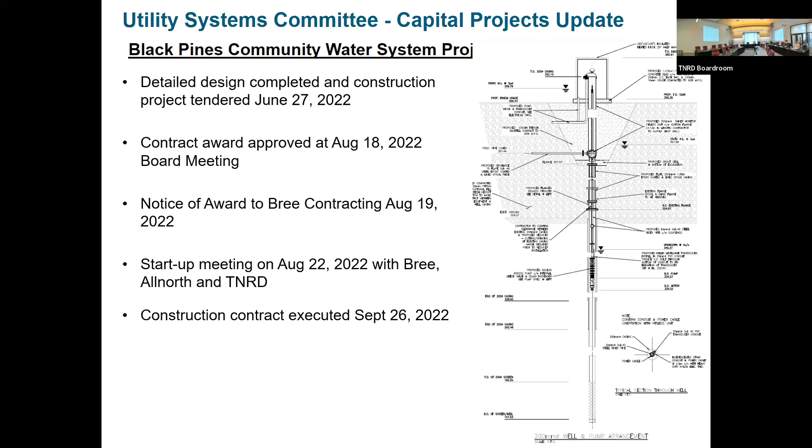The main reason for that is coming up. We have a very tight timeline, this has to be done by the end of February, early March for our grant. So the first time we'll see any work on site is when the contractor mobilizes on the 17th of October, and they'll start their earthworks.

Before the freeze up happens, we'll have the pitless adapters, which are the connections to the wells, and then the underslab spools. These are the piping that come up into the building, and the connections in between while they're building the grade up as well. That's targeted to be complete by mid-November.

The building itself should be complete, and I'm only talking about the structural part of it, by mid-December. Once that's complete, mechanical and electrical installations will occur during the freezing months, when we typically don't want to do a lot of earthworks.

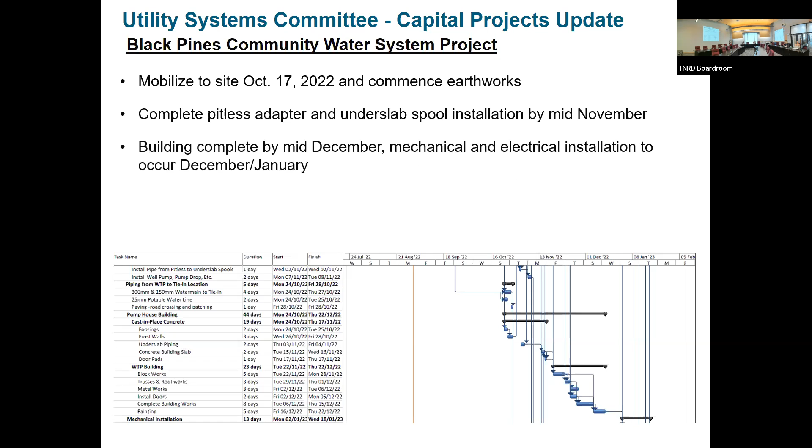Our completion date provided by our contractor and our consultant is February 8th, 2023 for this. We do have a deadline of March 31st, 2023 for the entire project, including claims and everything else. So it's a fairly tight timeline, and we're on top of this to keep them going.

I've thrown up an excerpt from the construction schedule for you to see, but there's a lot that goes into this project. We're tying in to an existing water system at the opposite end of the current source. We're replacing the current source with groundwater, and we're bringing in 2 wells to a single pump house, then conveying that into the distribution system.

We have a crossing of West Side Road to complete, and we're also working in proximity to the Trans Mountain expansion pipeline. Looking forward to this one, I'm really looking forward to this one being completed.

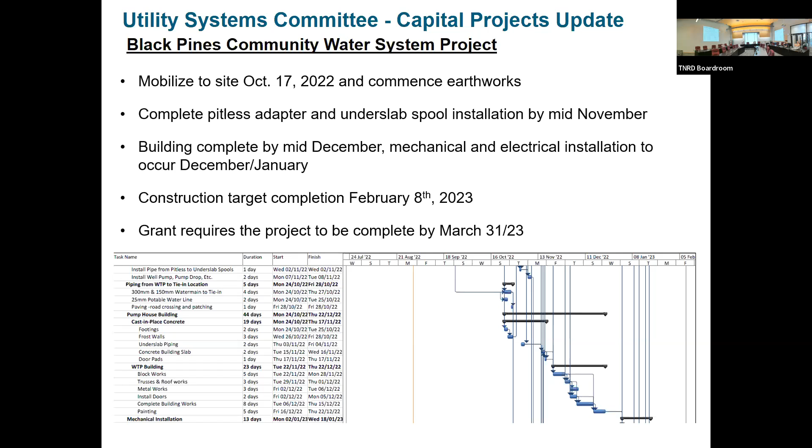Water metering program - this should be the last time we have this on our capital projects update. The final portion of this was to update our bylaw, which we completed in November 2021, and we did a brief update on this then. Mock billing is required to be completed for 4 quarters prior to switching over to metered rates for all communities.

We have completed them in Q1 for select communities - those were, I believe, Spence's Bridge, Del Oro, Evergreen, Maple Mission, and perhaps Walhachin. The remaining mock bill communities were sent out in Q2 of 2022.

These were late, so you may have some residents asking where these were. We did communicate that they would be out in Q2, but they came out about 2 months into Q2 due to a software issue we're working through with the finance department. It's a whole new process to try and do mock billing, and there have been some roadblocks there.

Loon Lake remains outstanding. I don't know if you recall when we presented the utility rate amendment bylaw in November, that we did not establish a rate for Loon Lake. It's a challenging one to determine what the utility rate should be, as it's very seasonal, and currently the water on or water off fee is set at 50% of the water on rate to continue to generate enough revenue to operate that system.

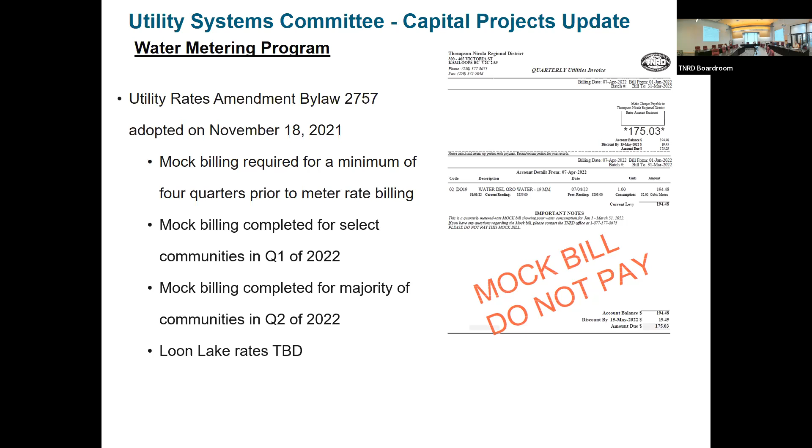Finally, for the metering program, we continue to encourage all of our users to sign up for EyeOnWater - this is their window into their water meter. The water meters update every 24 hours with the water volumes and flows up to a 15-minute interval, and users can see this. It's all cloud data through cellular technology, and users can sign up.

We've had really good buy-in, especially twice a year or so when our Waterworks newsletters go out, but it's starting to stagnate, so we're looking at different options to improve that.

So this project is complete, and final claims will be made in Q4 2022. By the end of this year, this one will be completely done and off our books. So really happy with how that one's worked out.

The Pritchard Community Water System filtration project has secured $4.95 million in grant funding, covering 100% of eligible costs.

Detailed design is 95% complete. We have electrical outstanding right now, and some of the engineering required for the optional items are outstanding.

But we have a 3D rendering of what the water treatment plant will look like, or is proposed to look like.

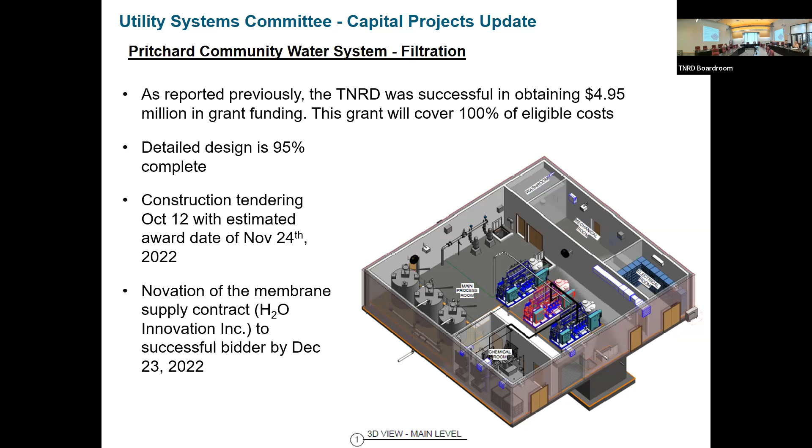There's a bit more on this. We have some optional works in this, since it's been a challenging environment with construction and pricing to figure out what we can squeeze into this. So we intentionally went ahead with our grant application with some optional items to complete, so that we could account for fluctuations in the market out there.

Some of those works would include the Bostock Crescent water main upgrade. This is taking an older 4-inch asbestos cement main and upgrading it to a 6-inch main to improve hydraulics as well as fire flows. And then there's the upgrade or conversion of our current dry well.

We have 2 intakes right now, one's a dry well, a failed dry well, and the other one is a wet well. The dry well is dry, the wet well has water coming into it from the river. The intent is to interconnect the two at a lower elevation. Right now, the elevation where they're interconnected is too high to operate for the majority of the season. So we would interconnect down below and take this very large casing that we have and convert it into a new intake.

This would allow us to eliminate and basically mothball our existing intake, which is from the 70s. So that's one we have our fingers crossed we'll be able to have enough funding for in this project, but we do have 2 alternative options for the intake as well.

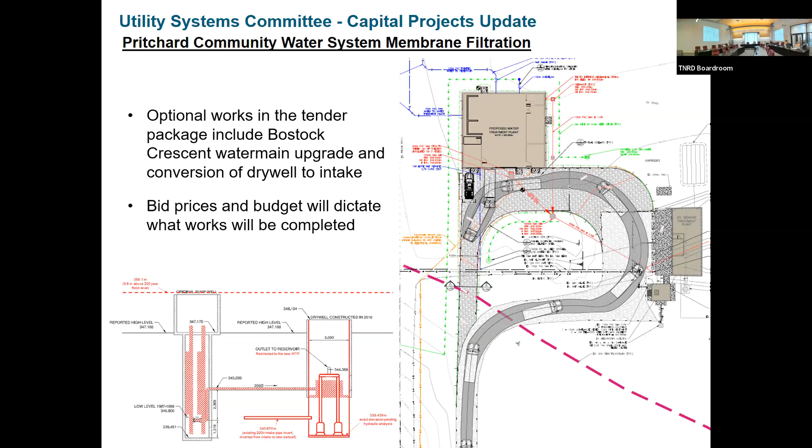All right, moving on to the Blue River chlorination, and this goes into our CCBF funding. So we awarded a construction contract to Spooner Industrial on March 3rd, 2022. This is shortly before the previous utility committee meeting.

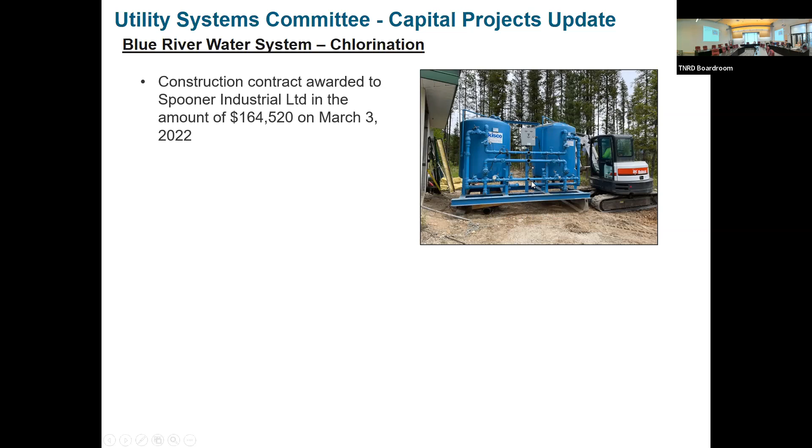This picture is of Spooner removing the existing filtration system that was never used from the current building, which freed up space for us to convert to our chlorination system. So we have a dual tank, dual pump system contained in the same area the filtration unit used to be, and we've added ventilation as well as some walls to keep that separate from the primary mechanical and electrical processes.

So the construction was completed in July this year, and we went online, and it's operational. We have had some issues as we've been operating - there's been some degassing issues, which result in airlocks of the chlorination pumps, which results in fluctuating chlorine levels in the system. We've been solving those and adjusting the chlorination dose to start lowering it.

So maybe more of an operational item, but we started off with a chlorine dose from the water plant itself at 2 milligrams per liter, and we've since July dropped that down to 1.3 milligrams per liter. We're monitoring it throughout the system to check the residual decay and how persistent it is. We'll be making adjustments operationally as we go to try and find a happy medium of adequate chlorination while minimizing the impacts to the customers.

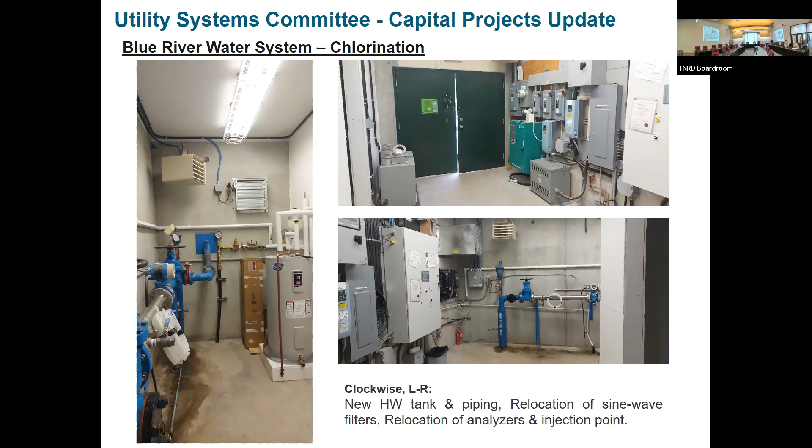Okay, yeah, because Blue River - if you know anyone in Barrier that would like to purchase some backups, I'm listening. Yeah, no, because they have 3 tanks in Barrier, the same as you had 2 in Blue River, and one duplicated within the tank. I don't know if they can use that, but the one is well utilized. So maybe I should tell them, talk to you about that.

Right, so what we have left here - we have these two tanks, they were emptied of the green sand which was in them. They were intended for the manganese and iron removal, and all the piping as well that comes with them and the controls are all there. We have those sitting down in Mission Flats, and we've looked at alternatives for it. The one issue we have is that it requires a significant amount of water to backwash to regenerate, and disposing of that in most of our current water systems is very challenging.

Yes, and they're equipped for the backwash, because we put in all new backwash tanks to utilize that system. So maybe Bob or somebody from Barrier Systems should talk to you about it. Yeah, because ours cavitated, it broke a hose inside that's cracked, and they have a problem with one tank and don't utilize it for the system, but that would fit right in. I've been up there and saw that they're exactly the same tanks.

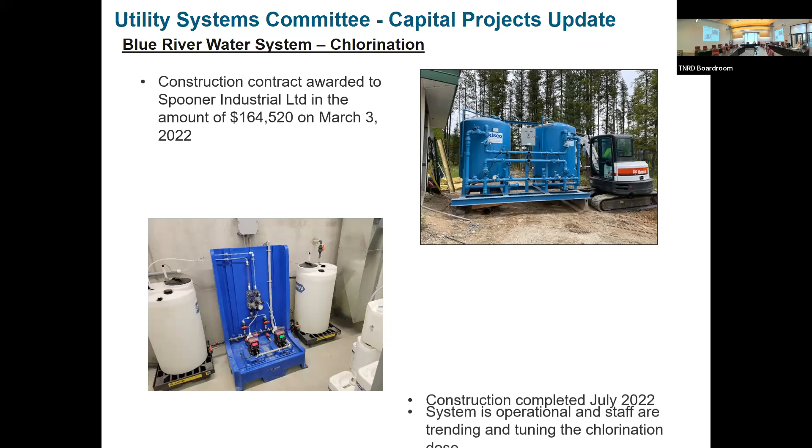I'll move on to our Paul Lake sewer system. The board approved $109,000 for a communication upgrade on this wastewater system, targeted at our lift station, for communication between the lift station and our wastewater treatment plant. The system was put in in the mid to late 90s, and not a lot of significant upgrades have occurred since then.

At the same time, we have a telemetry line that runs between the two locations that will be converted to a DSL line, which will allow basically an internet line between the two, which also allows us to get a VoIP phone down there.

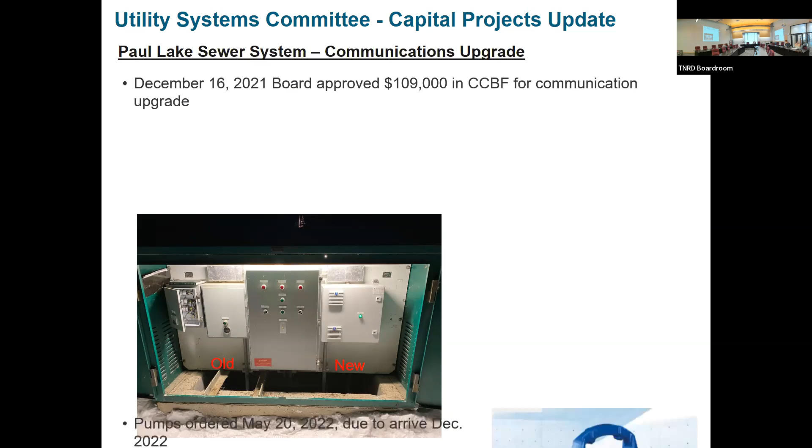This gets into some of the challenges we've been having with supplies and the supply chain. We ordered these pumps in May 2022, and we were originally told one pump was 6 to 8 weeks away, and the second pump would have been 6 months. Then it went to 10 to 12 weeks, and now we're expecting them to arrive December 9th.

We're trying to be proactive on this project, to get 2 pumps so that one of the remaining good ones is a backup, so we don't have to deal with a 6-month delay. And just to get to that point, we're dealing with these delays on this.

Fortunately for us, our starter panels, control panel, and communication devices are not delayed like that. There were some items we ordered that were only 3 days out. So the long lead time items were the pumps on this project - this is just going to extend this project longer, is all.

Then we have our automatic transfer switches. In 2021, we had CCBF approved for automatic transfer switch installations. We awarded a contract in June this year, and 3 of the 6 installations have been completed - Savona, Del Oro, and Walhachin. The Loon Lake ATS funding was approved, I believe, at the March board meeting, so we have yet to order that one.

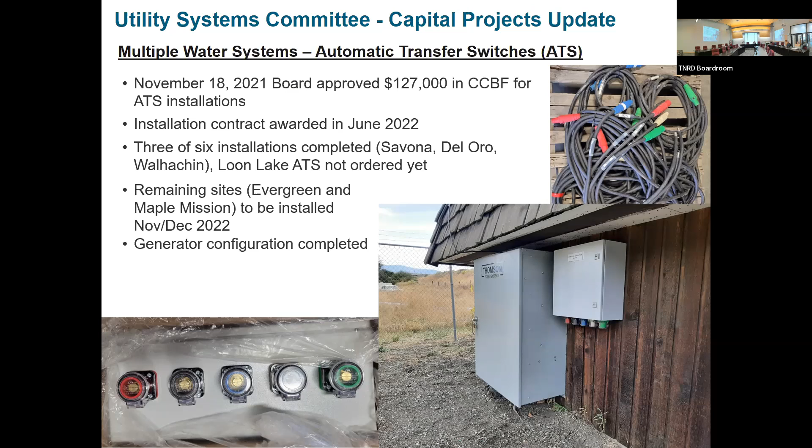This is a picture of the Savona transfer switch, and we also have a connection box for our generator. This is the bottom side of the generator connection box, and what that allows us to do is take our portable generator and, using the color coded cables, just plug them in - green to green, red to red, blue to blue, black to black, white to white - turn it on, make sure you have the correct voltage, and go.

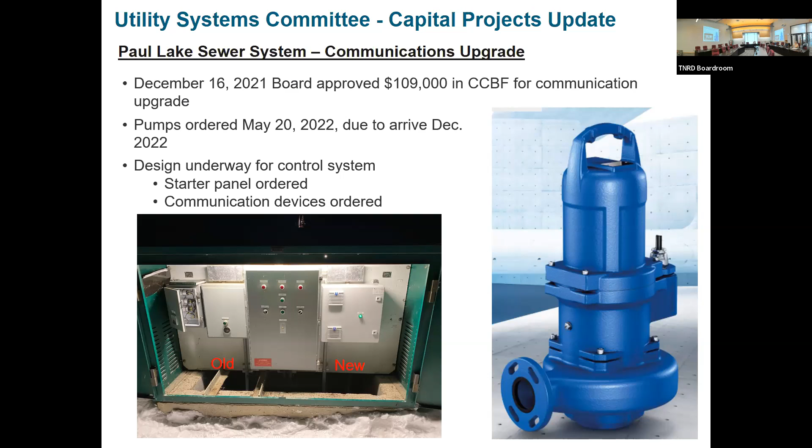So our transfer switches - 3 are complete. We have 3 more to go, one of those being Loon Lake. Evergreen is on the schedule next, and Maple Mission will be shortly after.

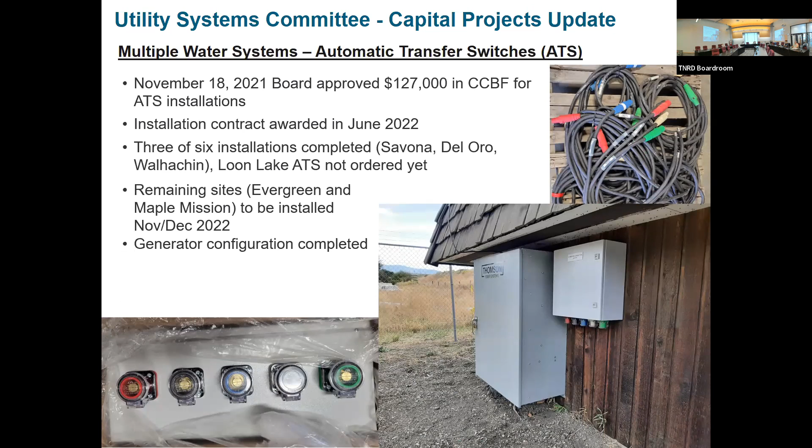Getting into our other funding, the donations from Trans Mountain and Canfor - we did a pre-design, commissioned True Consulting to complete a pre-design report back in June. This was part of a grant intake that had opened and we were looking at options, also furthering our original master plans which identified improvements for the systems. Our cost estimate on the draft report was about $5.3 million to build a filtration system similar to the Pritchard one for Vavenby. Three years ago when we applied for Pritchard, we were at 4.9 million, so costs have escalated significantly.

So we didn't move forward with the grant application - the funding wasn't there. But out of this draft preliminary design, we had some recommendations to further enhance it. One was to look at the environmental permitting summary - what requirements there are for discharging backwash water to surface, to ground, and the riparian area and other things like that. We also had a geotech investigation for the building, so the building design can be completed, as well as the rapid infiltration basins.

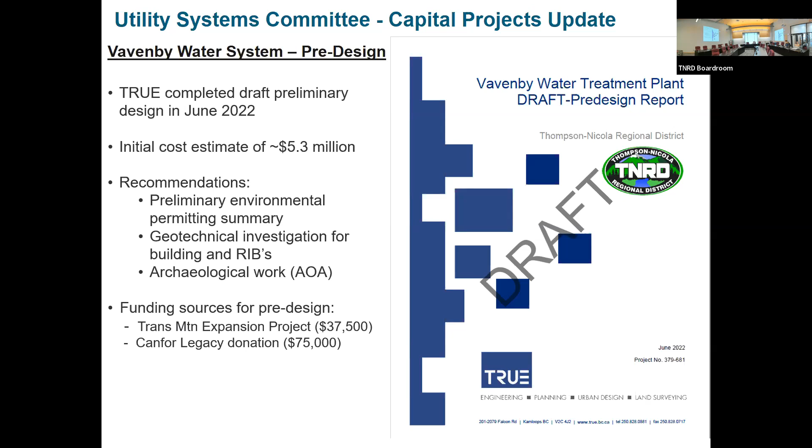Any questions? Probably asked most of them.

Steve, through Chair to Scott: I'm just wondering if there's been any follow-up or feedback from the ministers' meeting for small water system funding from the province for communities under 500, which are all of our water systems, if there's been any since that. Through you, Chair, nothing as of yet. I expect to see something into November, following up from UBCM. Okay, thanks a lot.

Thank you, Chair. Scott, going back to Blue River, can you give me an update on the proposed generator? I do not have an update on the proposed generator at this time. Okay, my understanding is that Trans Mountain promised one. They have one in the yard, and when the camp is finished they were going to give it to us, but it's kind of too big for what we need. I'm not sure what discussions took place between Jake and Trans Mountain. Can you follow up on that? Yes, I can follow up on that for you, for the new director. Yes. Thank you.

Thank you. Tyrone, I was wondering about these mock bills that are going out, how are they working out in comparison to the bills they're receiving? Are they higher or lower, especially in Maple Mission? That's within my area, so I just wondered how that's working out.

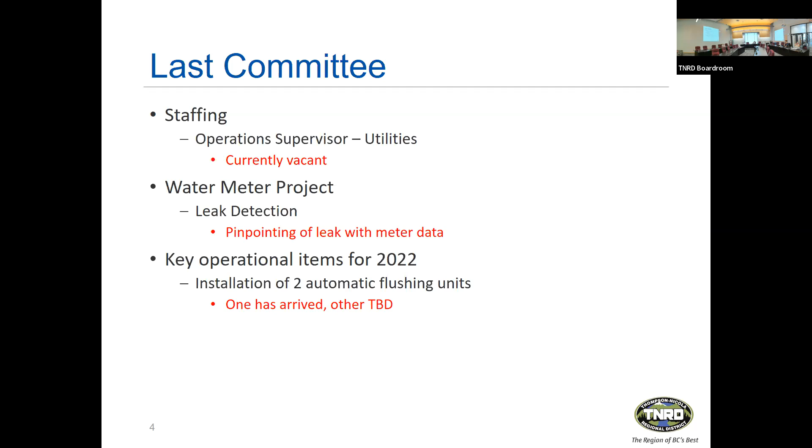Some key operational items for 2022 were the installation of 2 automatic flushing units. These are 3 to 4 months away. We ordered these once we had the funding, and one has just arrived, still at the supplier's ready for us to pick up. Now we have the joy of scheduling all this work before the snow flies and the frost hits. The other one, we don't have an update on delivery. One of these is for Savona, one is for Loon Lake.

And more tools for troubleshooting the systems. We were talking about the programs that we have for work orders in the field, as well as the software we use for tracking our flows, like Beacon and WIMS, which brings all the data together from our automated systems and our field collection systems.

Yes, I have a question, but to Mr. Hildebrand. I'm assuming that the staffing piece is Jake that we're missing? No, did you say that we're missing? Yeah, the staff piece that's vacant. No, that was Phil, the supervisor. I think you would have met Phil at a few meetings, or one meeting. Yeah, sorry, did you fill the position that Jake left? Jamie. Okay, so we're still short one staff with utility, a supervisor position. That's correct. Okay, yeah, thank you. Yeah, no problem.

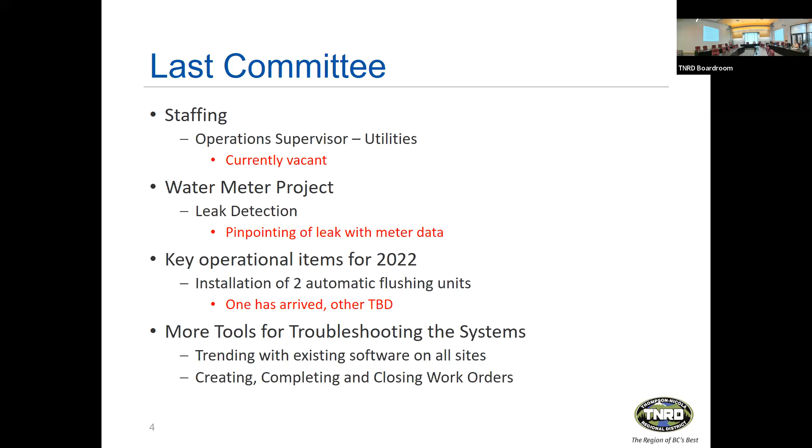So our operator toolbox, this is just to give you guys an update on where our work orders and GIS are. Our GIS team has built this using some of the software we already have in-house, called Workforce. This is an app. Right now I'll show you the app portion that our staff have on their phones or tablets. They can use it on either, or also on the computer, but that's more for in-office work. When you open it up, you have a map of the entire system.

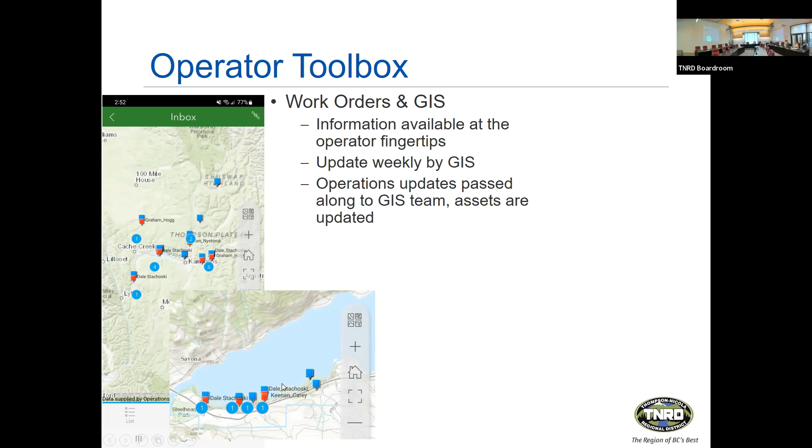These are screenshots from my phone yesterday when I was putting this together. You can drill down and see, let's look at Savona, and see what work orders are assigned to individuals down here. When you open up the work order on your device, you have the map and these details. So this one is a curb stop repair, with descriptions like excavate, lower, repair curb stop, replace if necessary, and locating, plus some other notes in there.

So we get this in the office, add it to the work order, and then the operators and staff in the field can take photos and upload them. We can upload all of our Call Before You Dig information onto here so they have it at their fingertips. One of the things this does nicely is allow us, in the field, to confirm whether the information is correct or not.

A lot of our GIS system is based on as-built or record drawings received from the multiple improvement districts before TNRD took over. So pipe types may be unknown, service line types may be unknown, and diameters are assumed based on the drawings. When we touch any of these underground assets, we can update and confirm or correct that. There's also a field to flag it for GIS to update, and the GIS team updates that. Those updates are typically pushed through weekly to the main database for TNRD.

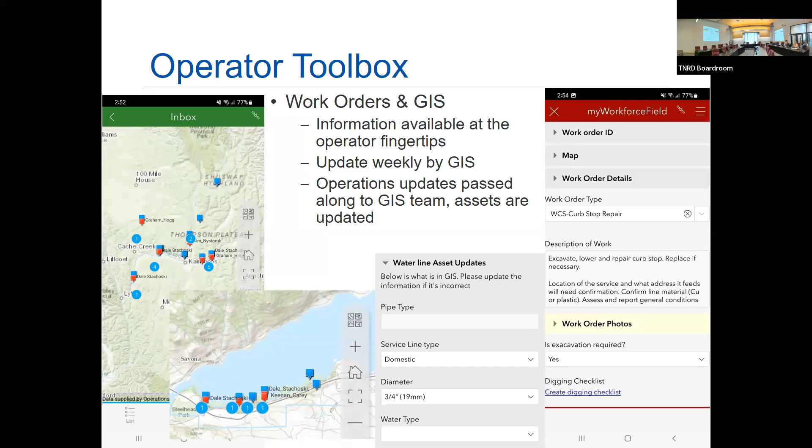This is a screenshot of what you see from the desktop app or on Workforce. It tracks and can trend all the work we're doing, helping us see whether we're doing a lot of service line repairs, water main repairs, or curb stop repairs, and what asset is failing, so it can further inform our asset management program. We also have a priority setting, low or high priority. The high priority ones are typically ones the guys are already on their way to, and we provide all the background data so that when they get to a Vavenby, Blue River, or Spence's Bridge where the leak is occurring, they have that at their fingertips.

The medium priority stuff would be scheduled a month, two months out. We have some of these that are in the planning stages from last year that we just haven't gone ahead on, or we may be waiting on materials or manpower to complete.

We can put the description of the work, which you can see on the apps on the mobile devices. We have two things: a work order and a checklist. The checklist is done for underground work so they make sure the BC1 calls are completed and we're locating the underground utilities. It's helping us as a safety form, a risk assessment for underground operations. You can upload photos from the mobile devices and from the desktop, and also add files to it.

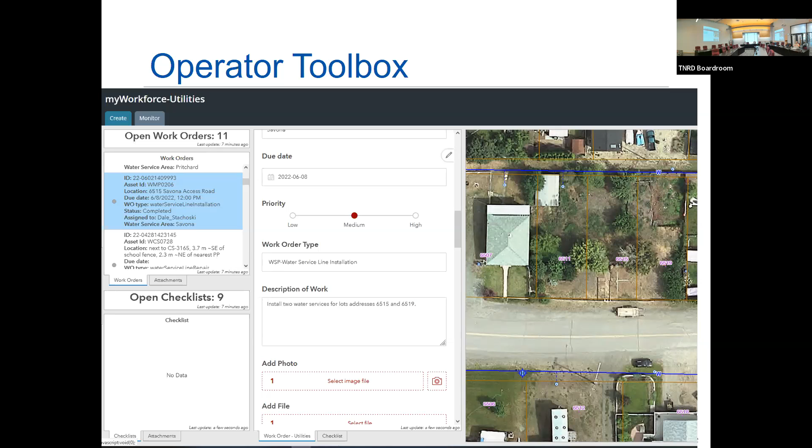All right, I'll get into the water system highlights. So in Blue River, I think we have this on every second committee meeting - someone hits a fire hydrant in one of our communities. This person decided to park on top of it. I don't know who the driver was. I did cut out most of the picture as I'm in the back with the ambulance. Looks like the airbags went off too - not a pleasant strike, I'd imagine. This will go through ICBC, similar to the incident we had in Savona, I believe, a year and a half ago.

So again, we're running into issues - this thing is still laying there, bent over right now, waiting for us to repair it since July. Dealing with the claim has added some time to it, trying to find a contractor to go up there and actually replace it. It's fairly involved to replace a hydrant that was broken off or damaged like this. You don't know if the thrust block is in one piece, and getting concrete poured in Blue River is not the easiest thing to do. The logistics of replacing these things adds time, not to mention that the replacement hydrant itself is 8 to 10 weeks away.

So we're expecting this to be replaced in November before the winter really occurs in Blue River. They might be working in the snow, but the ground won't be frozen. And we will contract this work out.

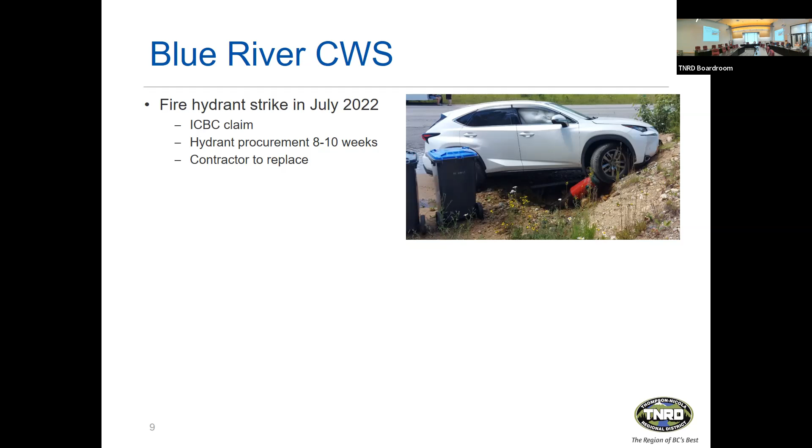The Trans Mountain Expansion Camp in Blue River connected to our community water system right around the same time we turned the chlorination system on, which was actually a benefit to the camp as well since we were chlorinating our system. IHA required them to chlorinate their camp, and they got to turn off their booster skid once they connected to our water system. We also meter the camp and have a shut off for them as well.

This bottom picture shows that meter and the back pressure or backflow valve assembly we have feeding the camp. This is also on our Beacon system. We invoice them for the water use and can track the water use as well, and adjust their fill times and periods to accommodate the community.

What their camp does is fill up a couple of cisterns, and then with booster pumps similar to what we installed in Evergreen a couple years ago, distribute that throughout all their camp buildings. So we can adjust when they fill those tanks and if it's going to impact our system or not.

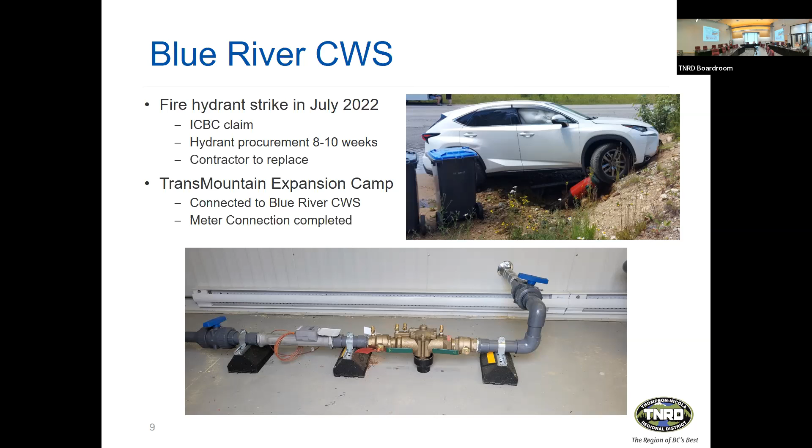Loon Lake water system. Loon Lake is another one that is lacking in cell service, and we've been running our SCADA system, which is the controls and getting all the data back from the online monitoring, the pumps, and everything.

Through a Galaxy broadband satellite link. And Starlink came out, and I was thinking this would be a pretty great spot for Starlink. There's no data limits on Starlink, and the bandwidth and speeds are much greater than the older satellite technology. So we installed the Starlink up there.

We were limited to how much data we were allowed to use, and we had overages every single month. We use more than 2 gigs of data for water system communications.

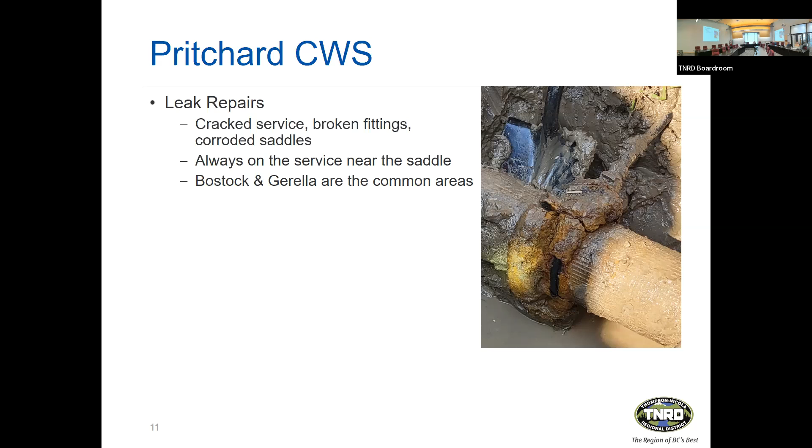So we've been doing a fair bit of these repairs. Bostock Road and Gerella Road are the common areas we were called to this year. This is the repair after it was complete. This one was actually an abandoned service. They had, I believe, consolidated or amalgamated 2 properties and abandoned this service. This was leaking underground with no indication that there was a service even here. So we found some very old record drawings, or as-builts, that indicated there's a service there.

We were kind of scratching our heads. Why is this water coming up from here? Pritchard also has a nice layer of clay that keeps a lot of the runoff very, very close to the surface. So we just threw a repair saddle on this. You can see down in the hole here on this AC pipe, and done. So it does take a while for some of these leaks to show up.

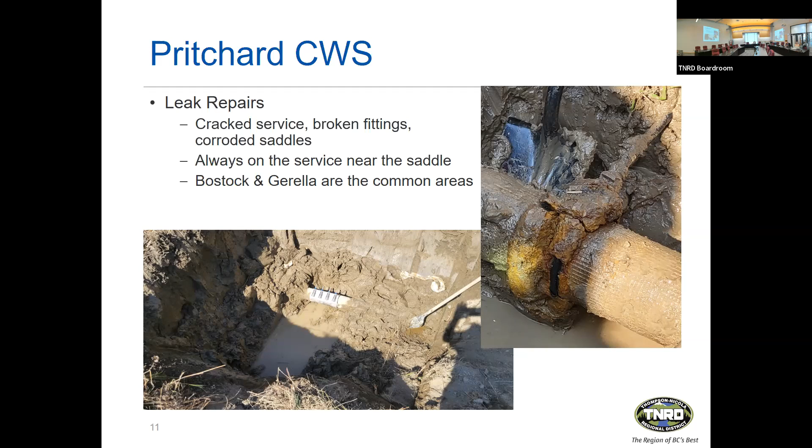And this is again one of those, the water meter advantage that we have. If we're pushing out more water to the reservoir than we're recording going to the customers, we know that we have a leak somewhere, and then it's a matter of trying to detect that, which is the fun art/science of leak detection.

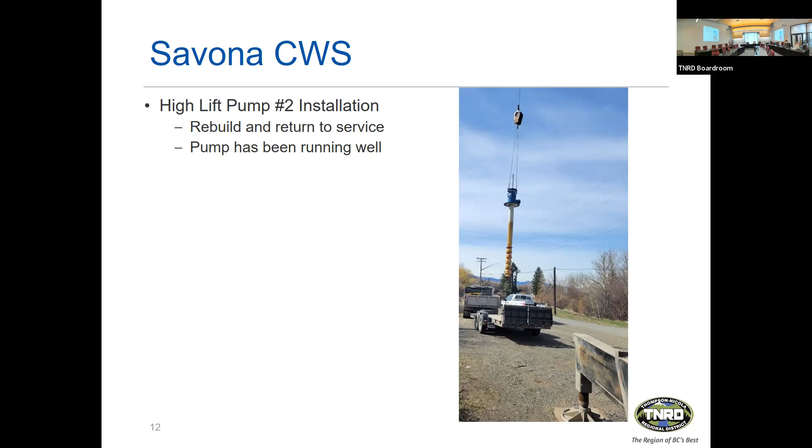So moving on to Savona. Earlier this spring, we reinstalled our high lift pump 2, craned it in. It was rebuilt and it's been running well since. This pump was one of the upgraded pumps, but the motor was one of the original motors done a few years before. There was an imbalance that caused some leakage of oil, and we addressed it prior to catastrophic failure. So we ran the Savona community water system on 1 vertical turbine all summer without issue, and now we have both of them there ready for the next season.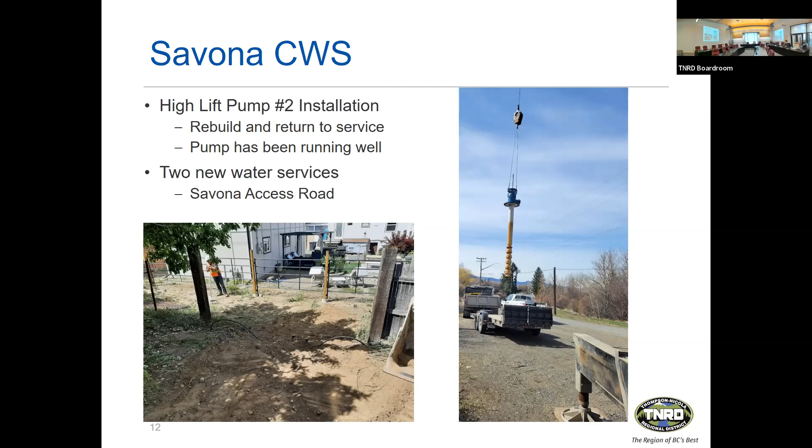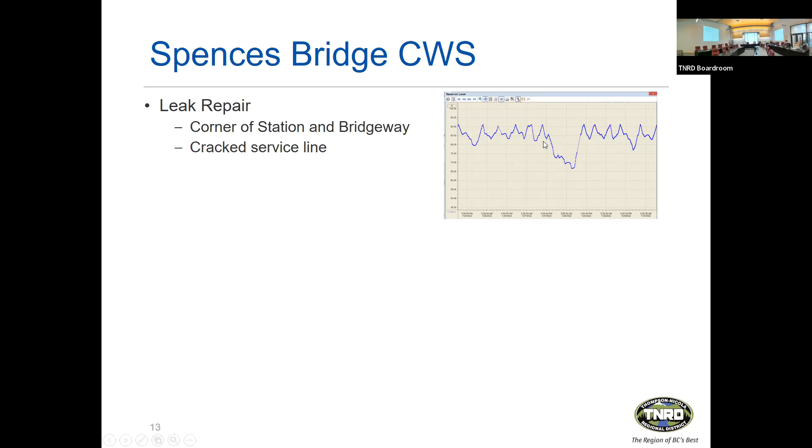And then, I know I said previously that our meter project was complete, but now it definitely is. We had one outstanding meter pit installation on the North Frontage Road in Spences Bridge. We had some issues accessing it for a while, sorted that out, and then went in there this fall when we had our crew back.

And installed - you can see our little tiny meter lid there. So, 6 feet down, meter pit, done. Last one - last of the old, I should say. I'm sure there'll be some new ones going in at some point, so.

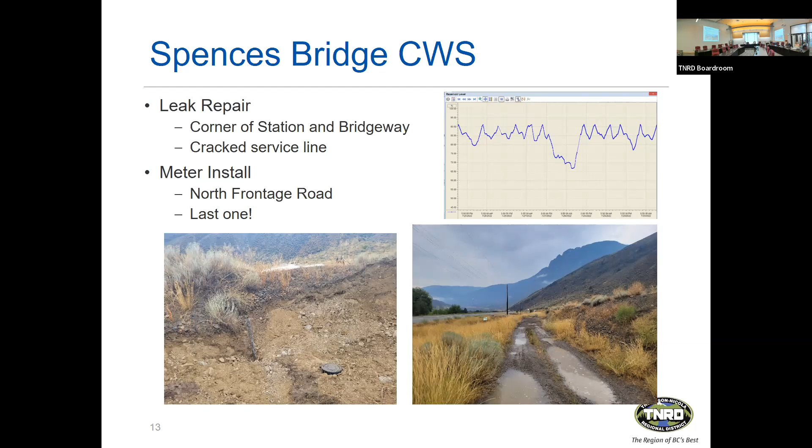Walhachin - we had some fun in Walhachin this year. We had an intake pump fail, so we lost pressure in the system. Sorry, I shouldn't say we lost all pressure in the system, but the loss of pressure on the discharge of the intake indicated that our pump had failed.

We picked that up, went to pull the existing pump and sled, and the cable broke. Thankfully we have a backup water source in Walhachin that we were able to run on, and we're actually running on it again right now. That allows us time to correct some of the issues here and replace the cable.

These are all flanged together because of the high pressure, so there's 8 to 10 bolts per connection, every 6 meters, which are corroded and rusted. And it also happened at a time when the primary tools we use for this job were stolen from our compound. So the guys were doing this the old-fashioned way with hand tools and having a great old time. Thankfully, with that backup water source, we had time to address this and get it corrected.

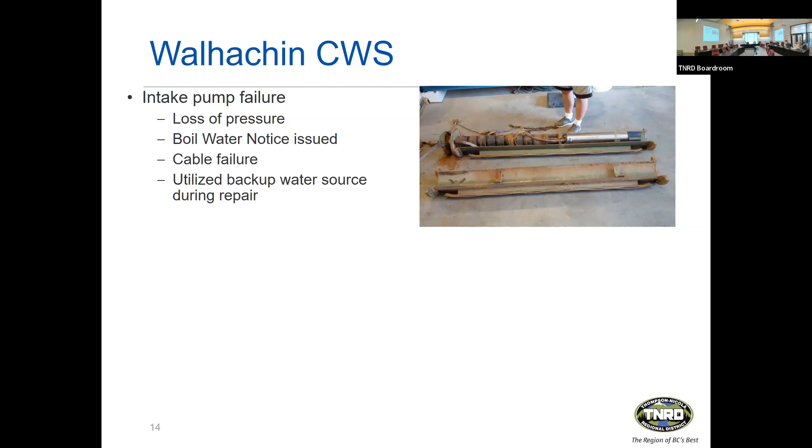At the same time, we have the reservoir cover that is getting up to 20 years old. In this reservoir, we have inspection hatches which have plastic flanges on the bottom that finally broke off. There's a drain on top of the cover, and this is all raw water pumped directly from the river and then fed back down into the community, filtered and chlorinated, and out. So around these inspection hatches, the water was seeping through and essentially coming out through the drain as fast as we could pump it.

So we basically came up with a temporary repair, which looks like this. We were scratching our heads for a few hours - what can we use? So originally, when the failure started, we had put inner tubes under there.

We talked to the supplier of these HDPE covers, and they said just put an inner tube underneath that area, pop it up, keep it above the water level, and you're good to go. So we had done that - it lasted about 2 years, and then they finally cracked off.

So what we did is we had some leftover cedar in the yard, and we built a little raft underneath. So to actually lift it, all we had to do was float it enough with those 2x4s to keep that opening above the water level, to keep the water from spilling out and keep the water below the cover where it should be, rather than flooding out. This is a little snippet I overlaid on the old picture, but it's pretty much what it looks like.

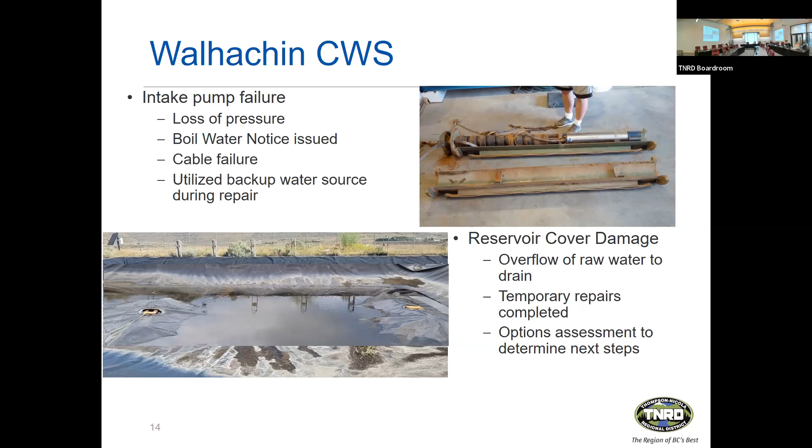So what's next? At the last committee, we were requested to review our water system acquisition and sustainability strategy. That's on my list for this fall and winter, to review best practices and other regional districts and municipalities and what they're doing. Our strategy is a collection of policies that govern our acquisition as well as our sustainability and the operations of our system. So we'll be reviewing those and bringing a report back.

And then rate setting and review, this goes back to Director Kershaw's question earlier, but our mock billing has started. We need to establish the rates for Loon Lake. Reviewing the rates and revenue for the current systems is on the list for this fall. That's what's next, and that's the end of that presentation.

Any questions? Tim, what is it that has actually been decided about Loon Lake? I don't know how many people are there on a full-time basis, but it seems to me it's very little. Yeah, I believe we have one, maybe two full-time residents in Loon Lake. There's 52 connections in Loon Lake, and I believe about 40 of those are active a season. So trying to sort out an appropriate rate structure for that is going to be challenging, but it's on the list now that we are into the mock billing and want to move away from flat rates.